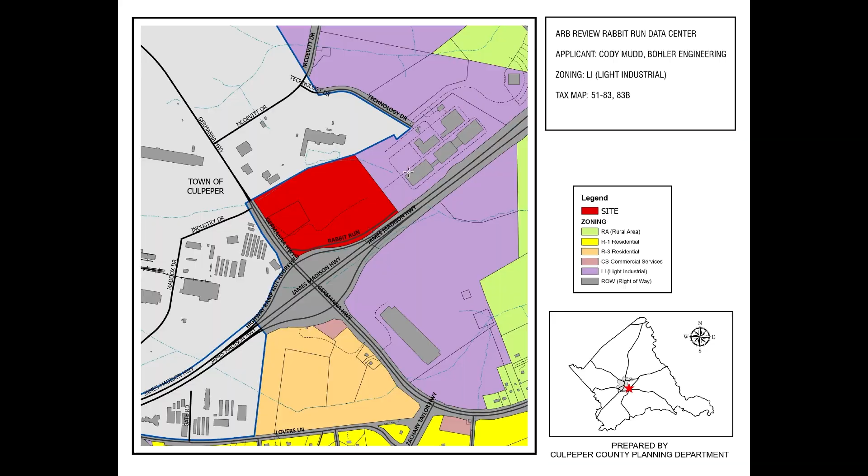If you'll indulge me, I'll just read a paragraph from the code. Basically, in making a determination as to consistency with the design guidelines, the Architectural Review Board may specify any architectural feature as to appearance, such as, but not limited to, motif and style, color, texture, and materials together with configuration, orientation, and other limitations as to mass, shape, and height and location of the buildings and structures, location and configuration of parking areas, and landscaping and buffering requirements, to the extent such practices are authorized by the adopted design guidelines, without regard to the underlying zoning district regulations of Article 20 of this ordinance.

However, the Architectural Review Board must balance their design decisions with the economic realities of those decisions, and the Architectural Review Board may waive any of the adopted design guidelines at their discretion. Such a waiver must be justified due to cost or some other unique circumstance or hardship.

I won't drone on, Mr. Chairman, but I will note that this application—you can go ahead to the next one, Chris. You can see their concept plan that was submitted. There are two buildings; they are under the district height limit. I believe they come in at around 61 feet, where 75 is allowed, so they're under that limit.

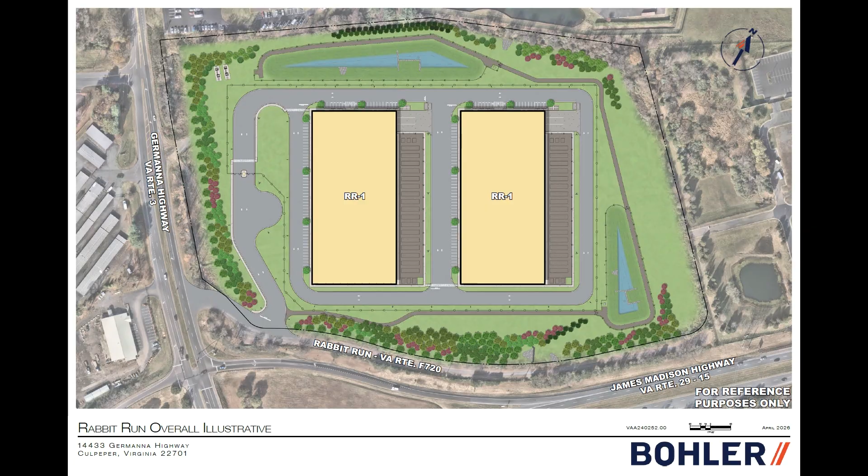They're obviously data centers, and massing is a large concern here, as you've seen with other applications recently. The applicants tried to mitigate this with screening that is more robust than the required screening within the landscaping ordinance. There are some grade separations, but not quite pronounced berms as with your last application up the road. Those berms were proffered, so there is some discretion there, but it's not as much of an issue in my mind. The height of the berms shouldn't be such a discussion as it was last time, because this was not proffered—this is a by-right, already zoned site, and it is under the third review for the site plan.

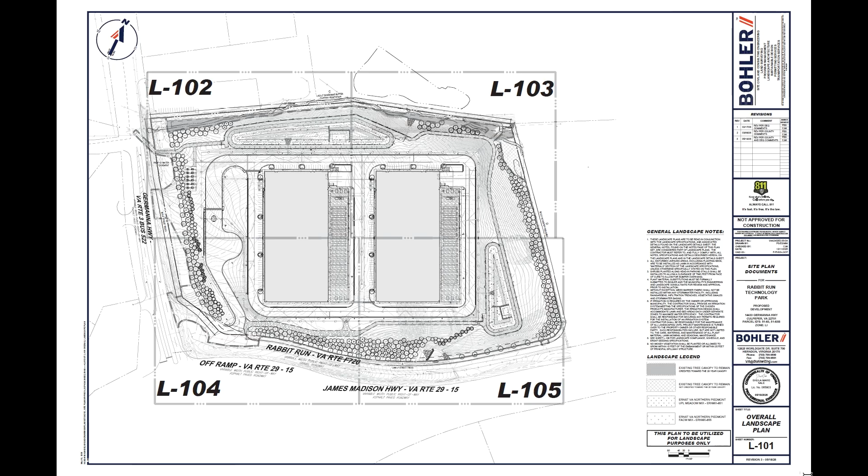Give me another one, Chris. This is the actual page from the latest submission of the site plan. If you approve the landscaping and the configuration, this will be made part of the site plan approval, and this is a precursor to final site plan approval—that's why we're before you here today. The applicant is present, and I'll turn it over to them because they're the ones that have the prettier slides.

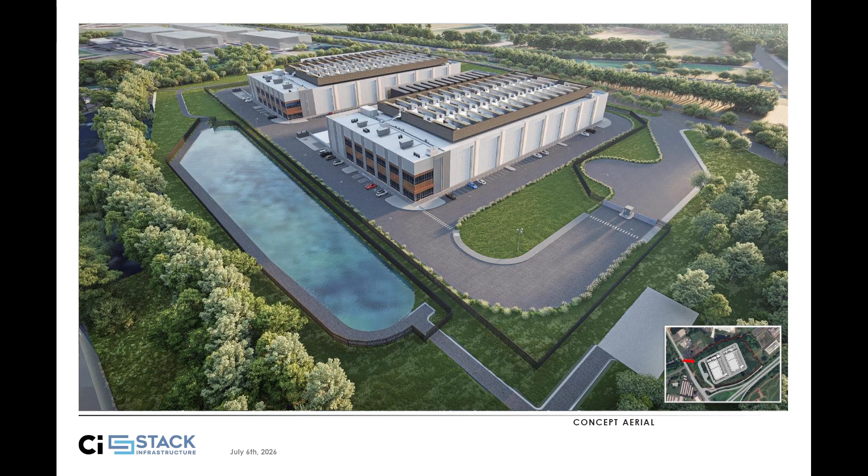This is a more illustrative rendering, but it is representative of the proposed development. This is imagining from Germanna Highway looking back across towards the highway. You can see the landscape buffering around the sides here, and out on the far side of this image is that access drive of Rabbit Run, all the way looking down overlooking the highway there. This is the general aesthetic we're looking for with the site.

This is another perspective of the main entrance here. This is the access off of Rabbit Run, which immediately goes into the secure facility entrance over there on the left. There's another access drive that ultimately gets you down to the stormwater management ponds for maintenance and access purposes. Otherwise, Rabbit Run continues as a parallel track off to the right.

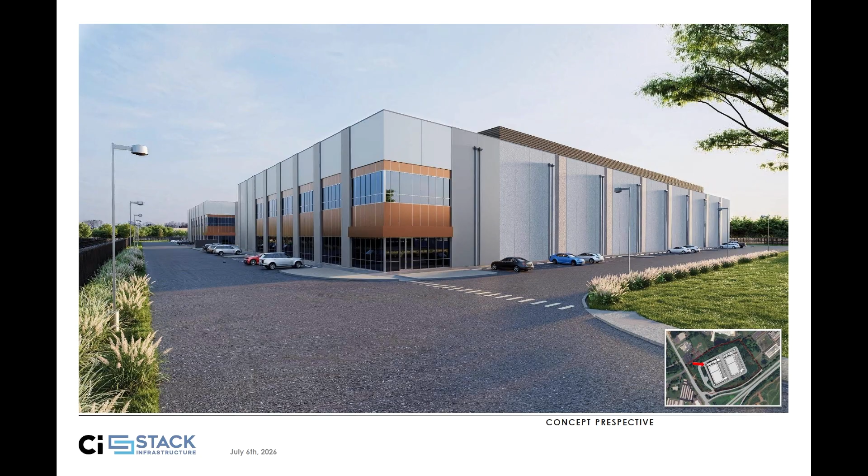This is, again, just another perspective, more of a ground level view here. This is within the campus. If I'm not mistaken, this is actually from the same Germanna corner that we looked at originally, but it's more of a ground view. So this would be, if you're leaving the town and going towards the main highway, the corner of the building that you would theoretically see if you could peek through the trees—maybe in wintertime or something of that nature, this would be the corner you would see.

And then this is just a photometric plan we have included here. We are following all codes and regulations with the photometric plan. Because of the nature of our campus being pretty well set back from the property boundaries, we're able to keep the light level low as they approach the property lines, and to a minimal. Within the campus, we still comply with all the codes and regulations there.

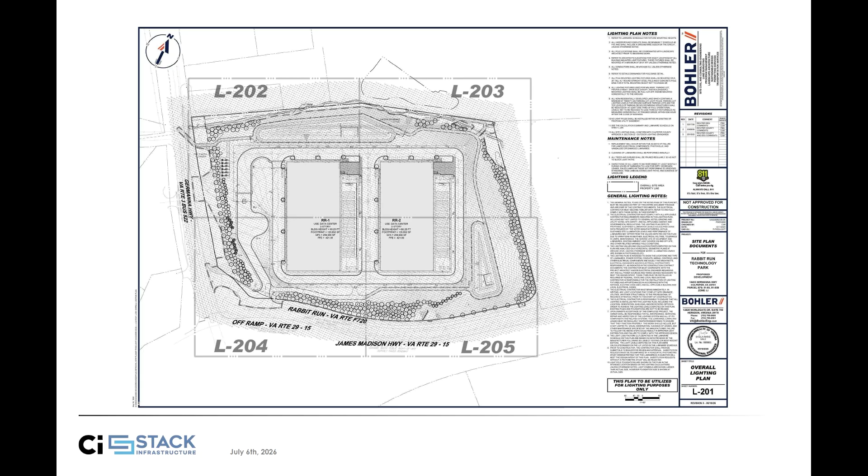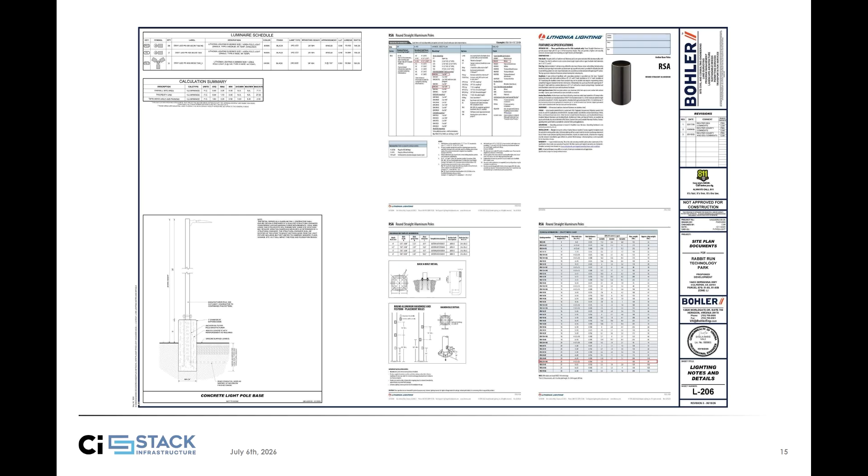You can skip it, this is just zoomed in for every page. It's light pole specifications, you can skip this one.

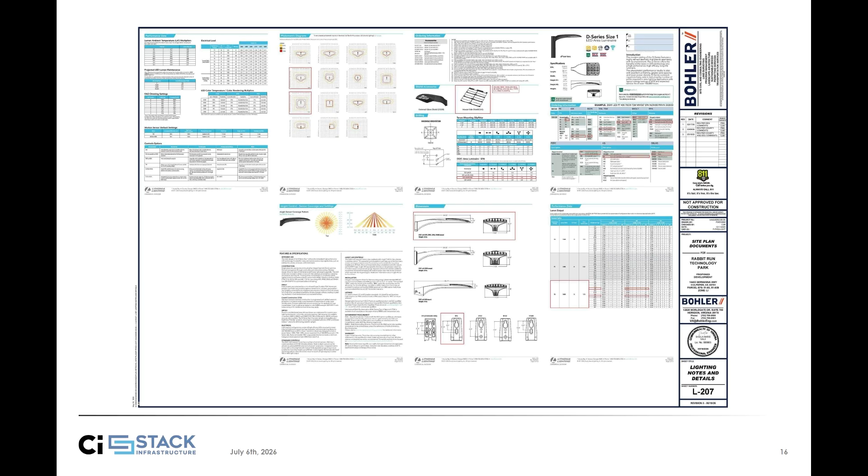Oh, that's it. Okay, that's all we got. Do you want to take any questions? Sure, yes. You didn't think you were just going to run through those. That was it, okay. Yes, Lance.

All right, so first question, can you go back to the landscaping plan for a second and just show that for a second? I guess my question is that there looks to be a gap in the back. Where is that, because there's an access road back there? You can't get trees in there, or what was the reason? Because I noticed in the illustrative it looked like there were actually trees shown in that.

Yeah, so there actually is, there's kind of a green fade on top of this, but there actually is a lot of existing vegetation that is going to remain. That's mainly because around our northern property boundary and around that rear side, on that other data center site, which is on the eastern side, there's actually a little stream waterway there. It's not a significant stream, but we're not intending to disturb that, and we'll retain existing vegetation along that streamway. So that little waterway actually carries water from across Germanna through a culvert and then along our northern property boundary. So again, you can see we're not developing all the way out to the property line. You can kind of see it through the aerial image there. There's a significant portion of existing vegetation back there that will remain.

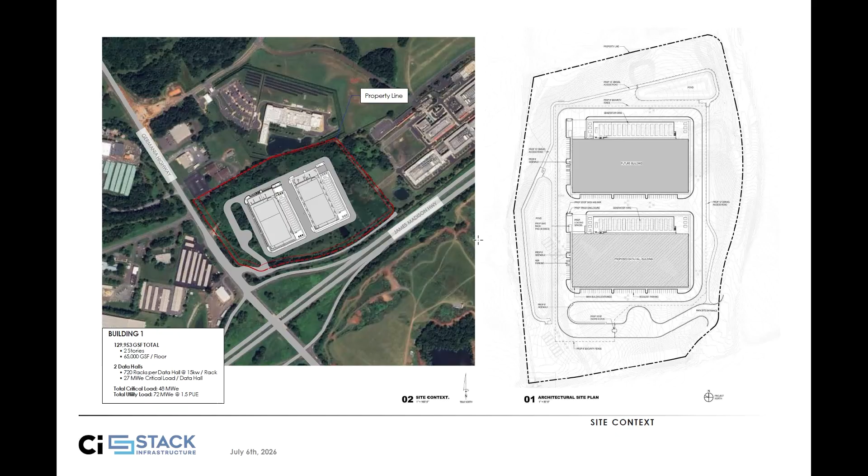Can you go back to the illustrative that you had? Yeah, so this would be overlooking, you can see around our pond and then around to that other side, the data center on the far side. There is a strip of trees in that area that will remain because it's on the opposite side of that stream.

So yeah, I guess I would just make sure it's shown on the site plan or whatever you're going to do there. Then, if you go to that other illustrative right there, the other concern I would have is, I don't know if you ran a sight distance profile at that entrance, making sure, because it looks like the trees are kind of forward, so you might have to drop some of those trees around the curb returns to make sure you can get sight distance looking to the left.

Yeah, absolutely. This plan has been through multiple rounds of review with our site plan already and with VDOT as well. So we are establishing those sight lines and making sure those trees are strategically placed to avoid that. Otherwise you just have to limb them up or do something else with it.

Right, and then the other question is, if you go back to the site plan sheets or the concept plans, are there power line easements or any kind of existing easements that run parallel to Rabbit Run? The reason I ask is you wouldn't want to have the trees inside the existing easements typically.

Yeah, not within our property boundary, and we don't intend to install any new power lines. There are existing power lines within our property along Germanna. Those are Dominion maintained and owned, unrelated — we're not touching them with our application. But everything with this application in terms of power will be underground.

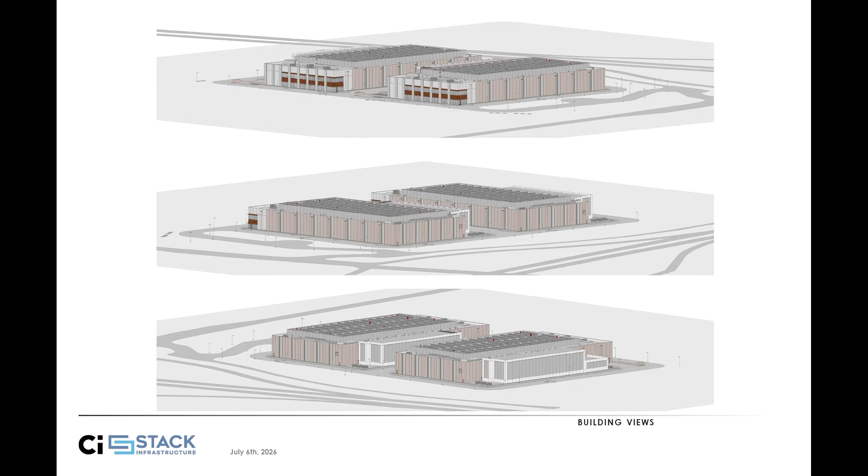I know we're trying to break it up a little bit, but if we've got 3 different types of panels, I'm seeing stripes all over the building. This looks good to me, where you have a consistent color and then a small break, then a consistent color and a small break. So I'm not sure why it's 3 different types of panels. You want to take that off?

It is a good question. What we are obviously trying to do is break up the mass of the building, as you understand. If you go to the flat elevations, it might be a little easier to see.

So what we've done is we haven't uniformly dispersed those colors. We have thin bands versus larger bands, if you will, to avoid that racing stripe effect that you're discussing. It's just one more way for us to play with how we take this big building and start to break it down so it's not so clunky.

So you can see, for instance, you've got tan colors and then a light gray color. Those are where we have the different finishes. That break looks to me like 2 colors, tan and light gray. And then there's one more in there, I think you see it, it's that dark gray. It's a very thin band to the left of the light grays.

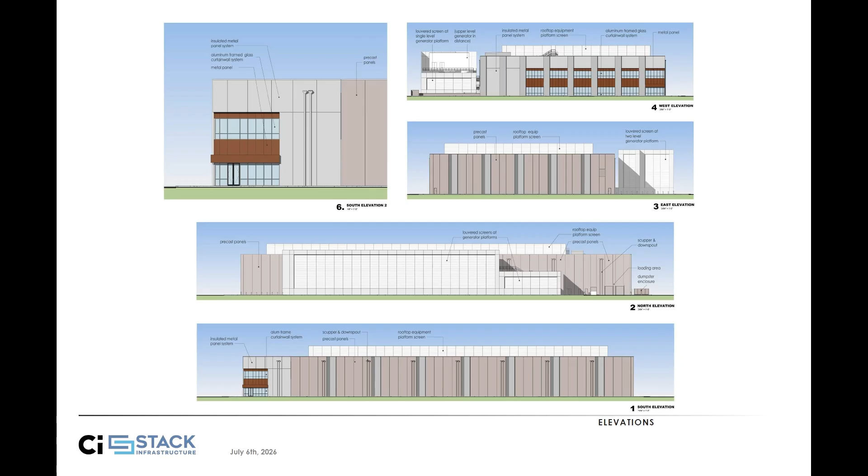Do you see that dark band? So there's one more carefully hidden in there. But again, we're playing with the saturation and the amount of it, so as we get darker we pull that back so it doesn't become overwhelming. That looks okay. You're okay with that? I was concerned that we're going to have 3 different stripes, then 3 more stripes and so forth. Right, it starts to look like an elementary school when you apply that.

Okay, thank you very much. Okay, anyone else? Yeah, I had some questions about the lights and stuff too.

I was concerned about the height and everything. On the site plan, the plan for the lighting talks about the maintenance of those lights and the trimming of the trees. Does that language pertain to the screening trees on the perimeter, or just the interior trees? No, it would just be the ones that would interfere with the actual lighting in the operational areas.

And then I'm curious, why is the gate set so far back into the property instead of just at the entrance? Mainly to receive vehicles - there's a process for them to badge in and get checked into security, and we don't want anyone backing out on the roadway. With the proximity to Germanna Highway, even though we have Rabbit Run, it's just better operationally to make sure we get people off the roads. Is that gate manned 24/7? It will depend on the end operator, but usually, yeah. Okay, that's all I had.

Okay, Mark, anything? Okay, go ahead. I just had a question - the fencing on site, it looks like there's a fence around the gatehouse and stuff like that. Do you have a picture of what that looks like?

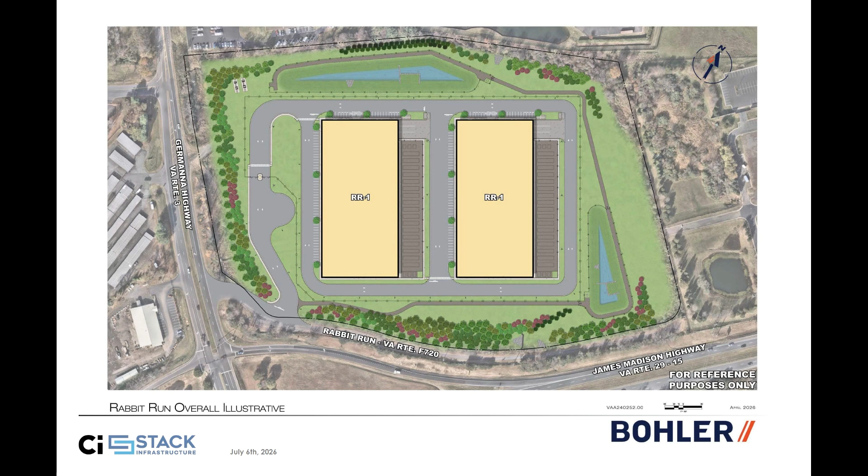That's something we could do, because that's what we normally do with those things. My next question was in reference to the screen, and whether everyone brings us in a real nice picture of how it's supposed to look.

But then we have a drought like we're having right now, and no one has a backup plan. So you don't have any berming at all?

Not at the moment, no. It is something that we can look to implement into the site plan, specifically along Germanna. I think that's an area where the topography probably gives some flexibility to do that.

As we get to the north side and east side on the plan, it's a little bit more challenging. The site drops off to that stream I mentioned, which is why we have the ponds there to drain into that stream and keep it hydraulically active. But we could look at adding berming along Germanna and to the greatest extent possible along Rabbit Run.

When you get down Rabbit Run, the topography starts to fall off quite a bit too. But we could certainly look at adding that into Germanna.

You all are taking one of the... you don't know how it got the name Rabbit Run, but that's where you used to go hunt, and there was nothing but rabbits there. And as I watched everything disappear, I was like, well, things are changing.

So before the berm, you just have the screen, and you have that now as the trees and all? Yeah, correct. So if we put a berm in there, then trees would be planted on top of the berm to help some.